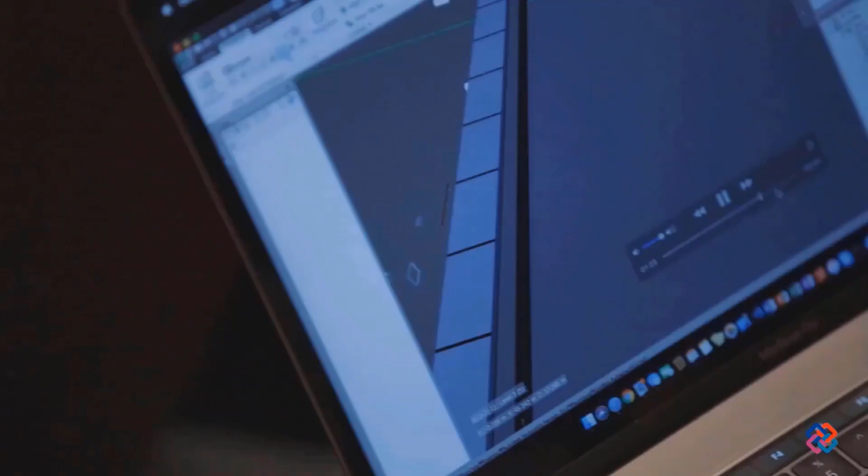BuildingSMART is the worldwide industry body driving the digital transformation of the built asset industry, committed to delivering improvement by the creation and adoption of open, international standards and solutions for infrastructure and buildings. BuildingSMART is an open, neutral and international not-for-profit organization, and with a global community of chapters, members, partners and sponsors, it's enabling better collaboration and digital workflows through the solutions and standards it delivers.

BuildingSMART International is incredibly well known in the built asset industry because we've developed open standards and services to support all the organisations that contribute to that and the end users that use some of those standards and services so brilliantly on their projects. BuildingSMART exists because we want to enable digital transformation. We're committed to promoting open data formats for all the players in the built asset industry, so all the people involved in an asset's life. And that means that they will be able to have the right information, the information they need at the right time.

BuildingSMART International visited Lombardi Engineering Limited, a Swiss civil engineering company, to discuss how they use open standards, open BIM, and how they translate these into real-world projects. As a BSI member, Lombardi deliver first-class tunneling projects with an open BIM approach.

Dr. Lombardi founded the company in 1955. We are active in a lot of countries: Switzerland, but also Europe, Latam, India and Australia. We have two main core businesses - one is tunneling and the other is all together with water, hydropower, delivery systems. Those are our two core businesses.

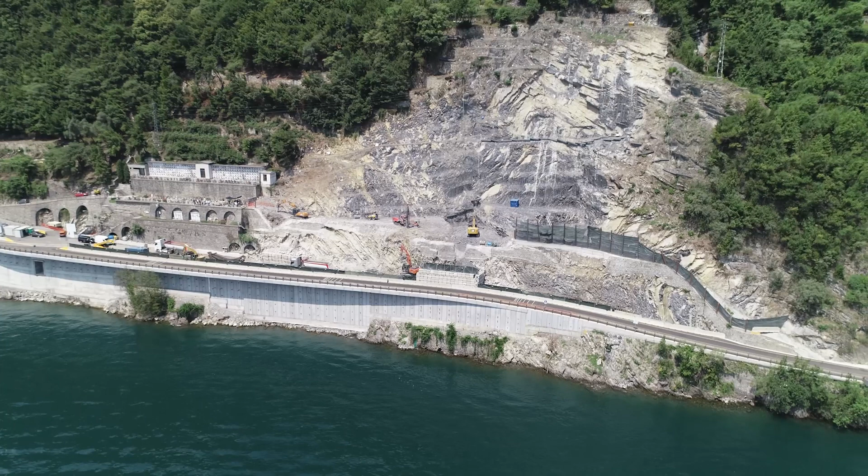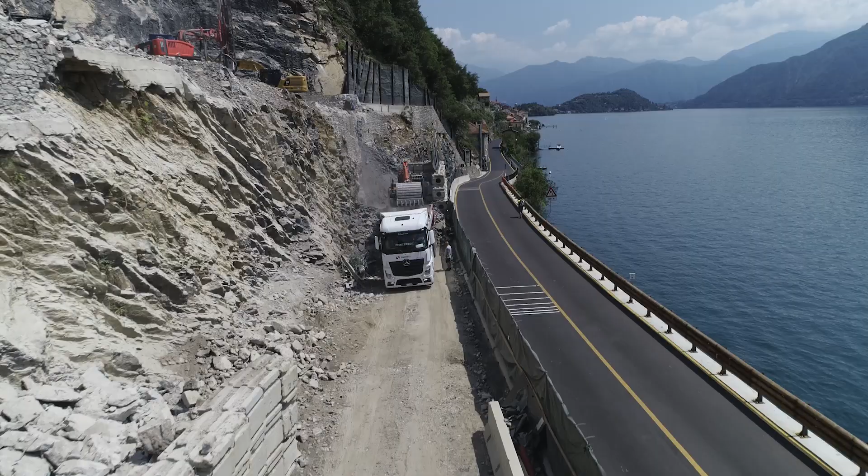BuildingSMART is crucial to one of Lombardi's current projects, the Tremezzina Variante. This is an underground road diversion project that aims to alleviate congestion in the small coastal town of Tremezzina. Going to visit a live construction site with Lombardi and ANAS, the operator from Italy, is incredibly exciting for me because it's one of the first times we're able to connect some of the theoretical standards that we've developed over these many years, some of the supporting services that we're developing, into a real-world project.

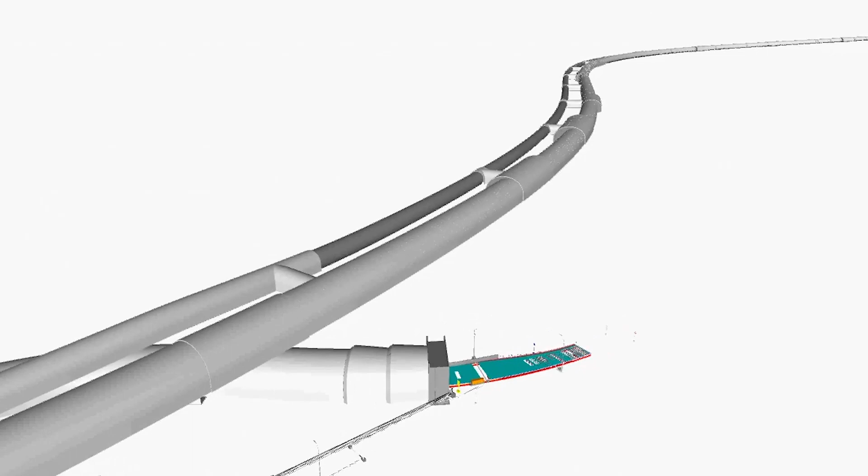The Tremezzina Variante is made up of 4 main tunnels running mostly underground for a total length of about 10 kilometers. As the designer, Lombardi is using an open BIM approach to ensure good collaboration, design review and flexibility with other stakeholders and the client, ANAS, the national road operator in Italy.

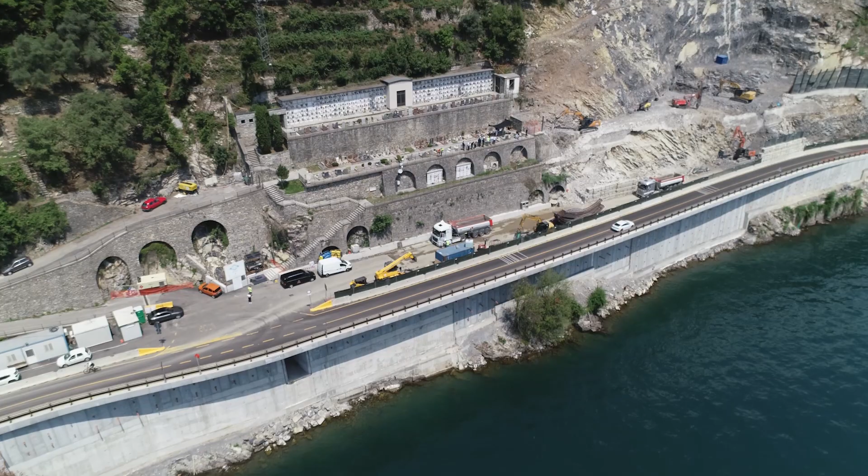The biggest challenge is the reduced space we have in this area. We deal with very few square meters of land, and the machine and all the equipment for the underground excavation must fit in a very close space. There are also very peculiar points where the tunnels are close to each other, so we have to be careful right there.

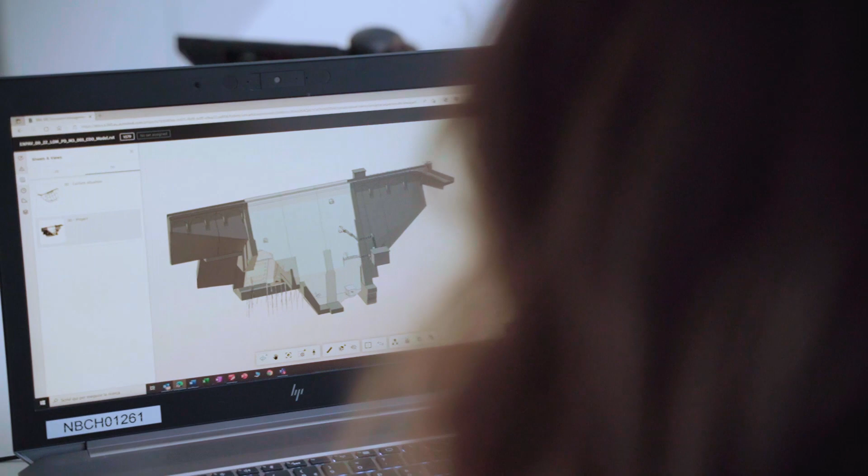It is really important to use the BIM method in order to check before we go on the construction site, where we have a very restricted time of construction because we impact a lot on the roadway. So we need to be sure that the planning and all the technical issues are very well set up, and no variations could happen during the construction phase.

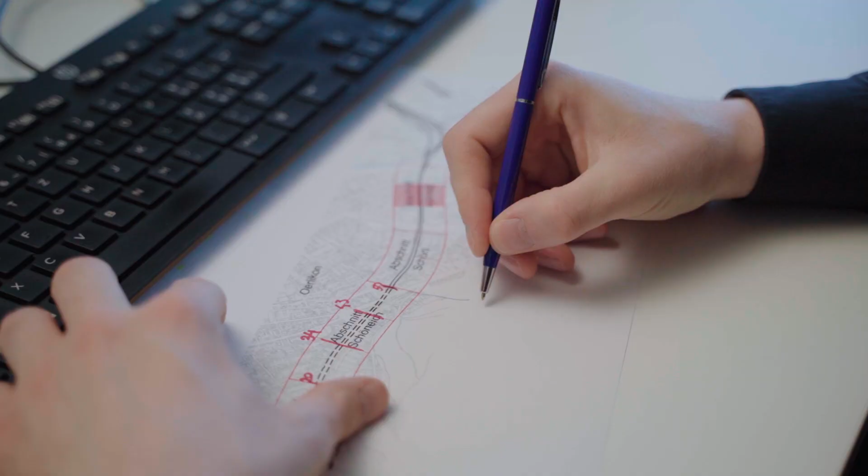OpenBIM is working really well in this project because it allows us to collaborate with other companies that are not working with the same software as ours, because they are working in different disciplines or different fields of the same discipline. So having an OpenBIM approach and an IFC way of doing stuff allows us to collaborate with them without any troubles.

This project has created confidence in the open BIM design work for ANAS, a company that manages over 30,000 kilometers of road in Italy and over 1,800 bridges, among other work. They also see the benefit of open BIM and want to drive more projects in the future.

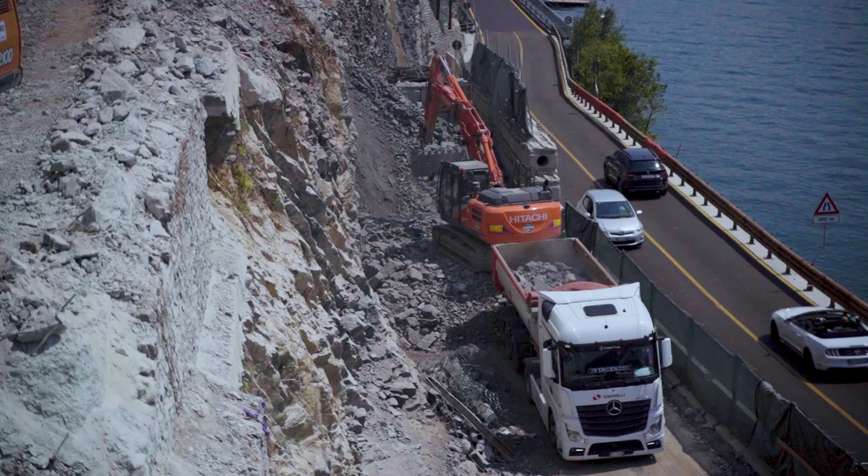ANAS for us is very important to obtain correct data to use during the maintenance, and this is my principal job, to check this data, to define the rule how this data should be used during the construction sites and during the maintenance.

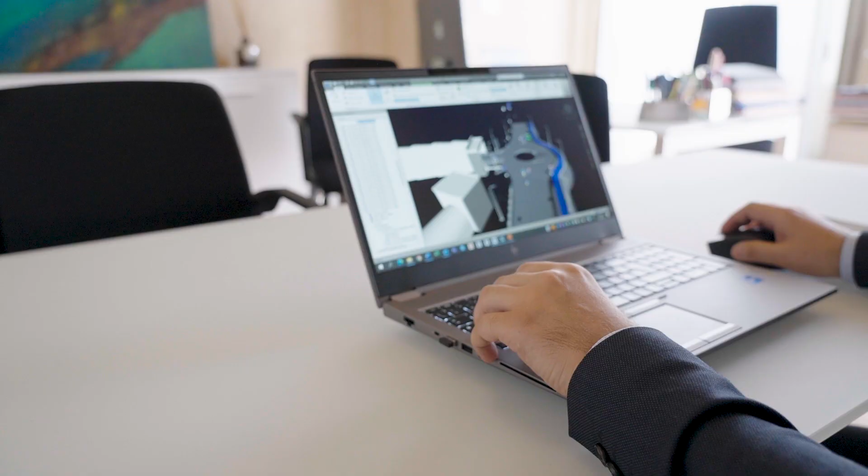BuildingSMART standards is very important for us because we can manage a lot of information. Obviously, in this project it was very hard for us, but that's simple. We can manage a lot of information properly in a simple way.

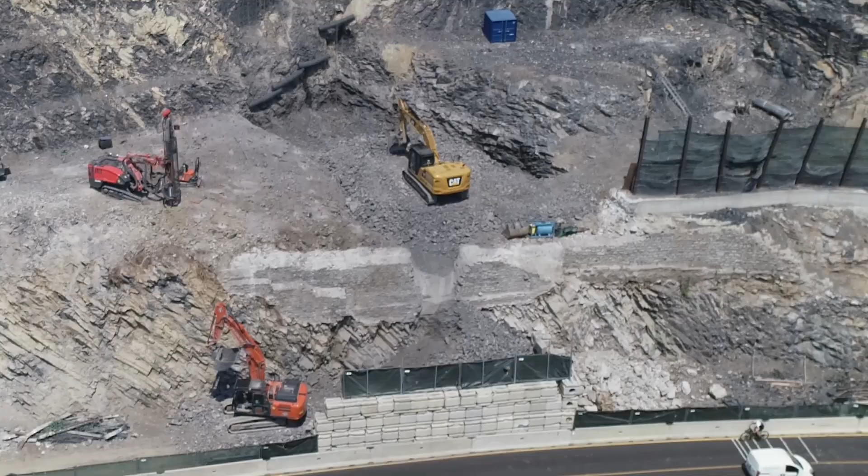With clients asking for more open BIM readiness and recognizing the need for IFC standards, Lombardi have found themselves in a leading position to provide these skills as part of the BuildingSMART community.

We are at the Colonno portal, the southern end of this alignment, and you can see behind me the excavation in which there will be the three entrances of the tunnel: the main tunnel, the service tunnel, and the Colonno diversion. You can see the very challenging area due to the reduced space, and the excavation will take place at that chainage.

I'm very excited to be here after we worked a lot of time on the model, to see the construction site and see the development in real time. We checked the development after many days of work in the model, and now it's very exciting to see the real construction site. Well, it's fantastic to be on site and see the theory being put into practice.

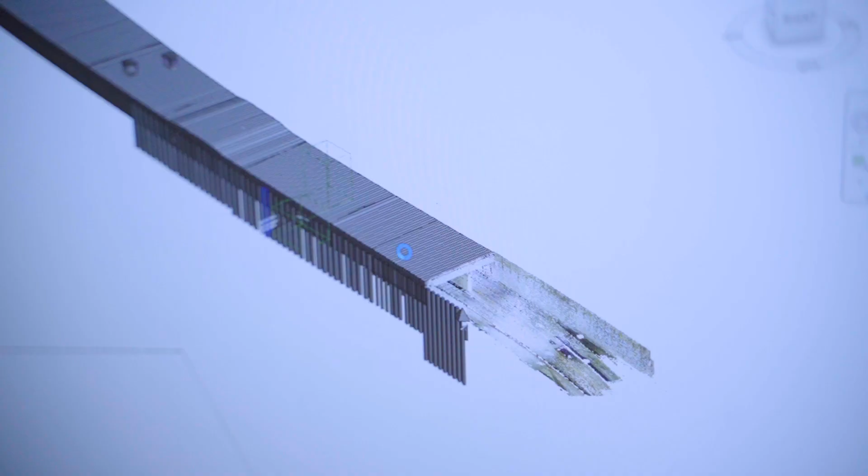Tunnelling projects have always been difficult, but this one looks to be even more challenging than most because of the tight constraints of the site. The digital approach that they're taking with the design, I think, is informing how they're managing their logistics. It's also informing how they're managing the decisions regarding the geological excavations and the access for the design tunnels. So to me, this looks like it's a really challenging site.

In what ways has the digital approach helped you overcome some of the problems? The digitalization and virtualization of this kind of item permits us to anticipate the big problem that is the interchange here, the main point of this part. And in the office you have this part modeled and you can study it better.

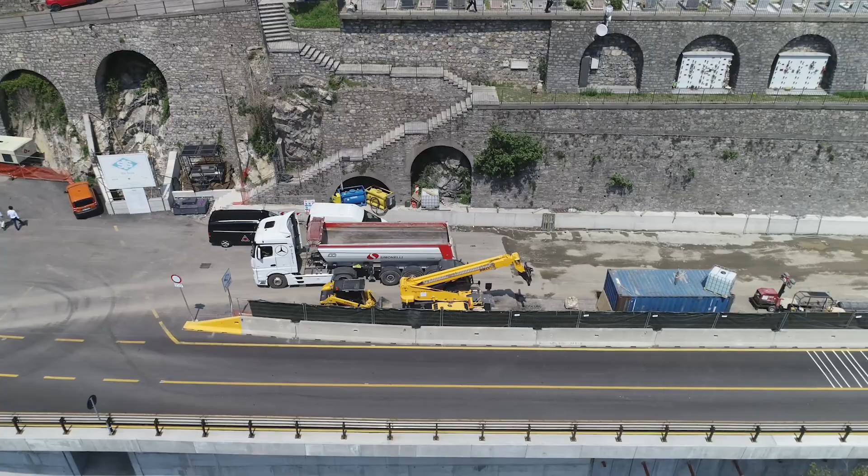So not only have IFC standards and OpenBIM enabled Lombardi to deliver the detailed and strategic design needed for this particular project, they're also helping to win more projects and to deliver trust and confidence with their clients.

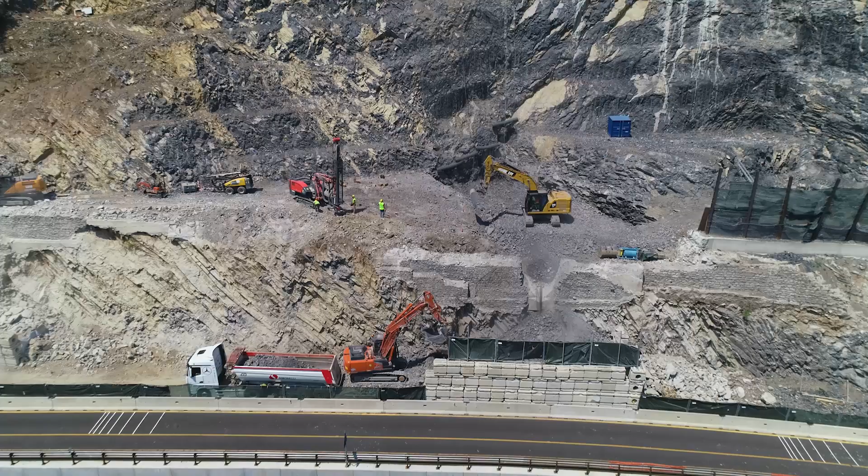BuildingSMART International has helped Lombardi win a new tender just in the last tender, because, for example, clients are now asking us, how do you want to approach your project using the OpenBIM standard.

We are developing all our standards in an OpenBIM approach because we trust that this is the only way that we can go in the future with the development of digitalization also in our company.

Working with Lombardi, BuildingSMART and OpenBIM gave us a lot of confidence.